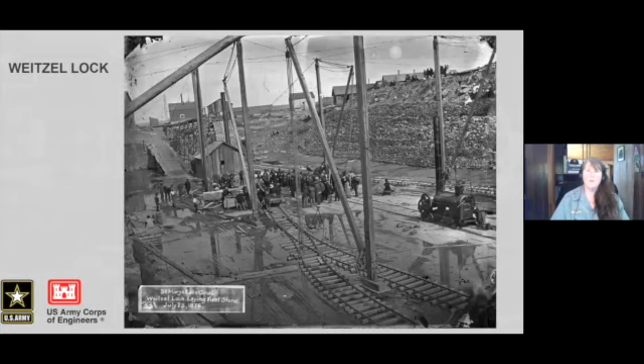Here a little group of people has gathered in 1876 to mark the placing of the first stone. This stone, by the way, is in the park, and if you come visit, you can go do another selfie there.

About a year after the placing of that stone, we have the chamber starting to take shape. You can kind of see the outline of the chamber - it was wider in the center than at the gates, which is why it has this weird little angle. We don't have hardly any pictures of this lock's construction, but this one was pretty good. I want to point out this lock is being made with cut stone - you see all that stone cut, and they're using stiff legs to place the stone and start constructing that chamber.

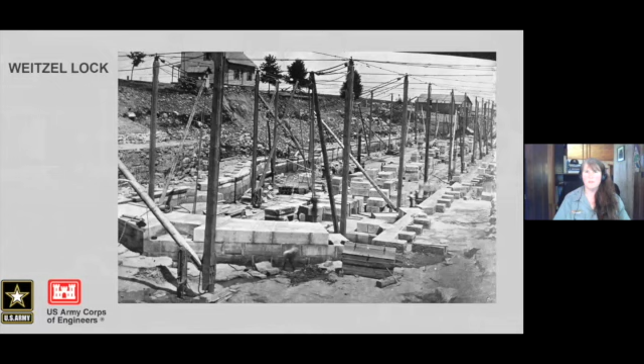Some more historical context: I'd like to point out that we had 3 presidents in 1881. Rutherford B. Hayes finished his term, James Garfield won election and was inaugurated, then was assassinated, and Chester Arthur finished his term. Two of those presidents, Hayes and Garfield, were Ohio natives. Another event in 1881 - the Cincinnati Art Museum was founded.

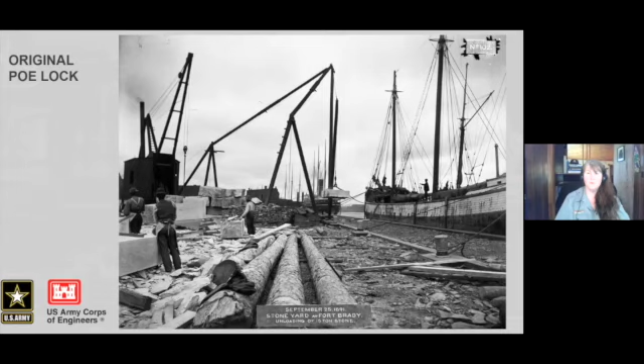On the Fort Brady property, there was a pier, and that's where they would unload the vessels that were all loaded with that stone. They used stiff leg cranes to lift them off and get them where they needed to work on them. I found a fun little Ohio connection to the Soo Locks - a lot of that stone came from Kelleys Island, Ohio. I found in our collection these pictures of them loading the vessels there. There were some quarry pictures too, but I already confessed I'm a boat nerd, so I went with the picture with the boat.

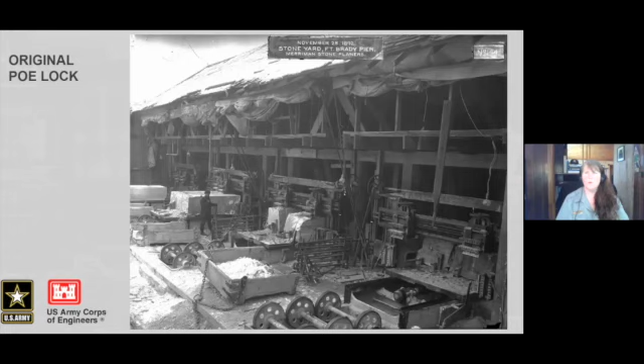Most of the pictures in the glass plate negative collection are of big things. A lock is a massive machine - they're some of the largest machines on the planet. So most of the pictures are very big and you don't see the people other than as a comparison for scale. These are some of my favorite pictures because you see the thought, the concentration, the effort of the work that these guys are doing.

If you follow our Facebook page on the Detroit District U.S. Army Corps of Engineers and you've seen our winter work pictures, you might recognize that I am definitely biased and that's the kind of pictures that I also like to take.

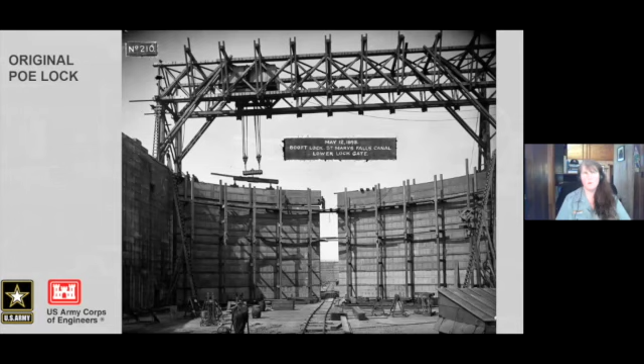Here they're assembling the gates in place. The gates are huge and we are able to lift them using hydraulic jacks and we have to work on them, but that's a whole different program, I won't get into that. But here they're building the gates in place, and then a picture of them after they were done.

I will also point out that these gates on the original Poe lock were the first on the St. Mary's River to be made of steel. All of the other gates were wooden.

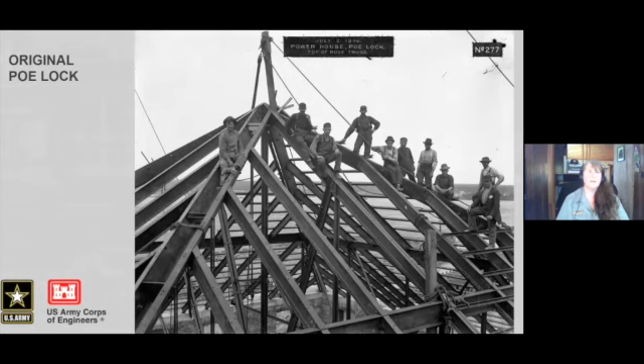And another photo we can never recreate, and I don't know who would want to try. This is the peak of the administration building roof. As you'll notice, there are no hard hats yet - that's not a thing. There's a couple guys holding on to ropes, but otherwise they're all just up there. No fall protection, nothing. Where they are is at least 4 stories off the ground.

That lock opened in 1896, 800 feet long, 100 feet wide. It was designed to lock 2 boats side by side, a way to try to make it more efficient. So they could do 4 if they were small enough, or at least 2 boats every time.

This lock was named for, wait for it, another Ohio connection - General Orlando M. Poe. He was born in Navarre, Ohio, and he was a Civil War general. He was the Detroit District Engineer and Commander for 2 different terms. He was also in charge of lighthouses for quite a long time. There's a distinctive style of lighthouse named for him - Poe-style lighthouses with a giant conical tower and an attached dwelling. There's about, I think, 9 or 12 of them all over the Upper Lakes.

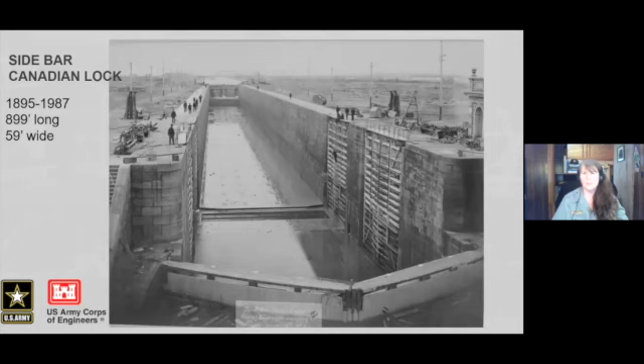About the same time frame as the construction of the Poe Lock, beginning in the late 1880s, they started their project on the Canadian side, around 1870 to 1880s. It's a big project and it takes a while. They built their own lock on the north shore of the river. This is a picture of it when it was nearly done. When it opened at 899 feet long, it was the longest lock in the entire world, and it was the very first one in the world to be powered by electricity. It had water turbines which generated electricity to operate its machinery.

This original lock closed in 1987. Part of the wall was collapsing, but they managed to stabilize it. In 1998, they opened a brand new lock inside the original chamber, which you see right here. It's the cutest little lock you ever saw, only 253 feet long and only 9 feet deep. About the biggest boats that can pass through it are the Soo Locks tour boats. Whenever the border opens up again, if you have a passport and you're up there, it's definitely worth a visit. It's a great Heritage Canada site. They have a museum there, and you can walk all over the grounds. It's really a beautiful place.

Back to the US side of the locks, traffic is continuing to increase. That just seems to be the constant drumbeat. We have 3 locks operating on the river: the Weitzel lock right here, the original Poe Lock over here, and of course, on the North Shore, the Canadian lock. And we're still struggling to keep up with the traffic.

Luckily, we got another lock approved. We're not going to replace either the Weitzel or the Poe Lock, but we're going to build a brand new one. The work on that lock, the Davis lock, started in 1907. What you see there is a team getting core samples of the bedrock below the surface. I've been told that we still keep and protect these core samples, and they are kind of a document that can be referred to by engineers.

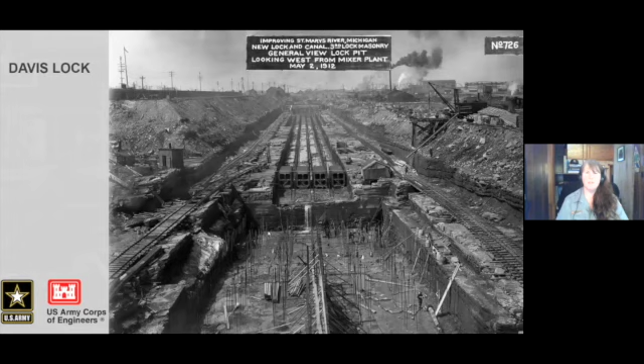A couple quick hidden features—I love telling this to visitors who come to see us. Most of what makes up a lock is hidden from sight; it's underwater or underground. These construction photos let us show you some of those hidden features. These are forms for the culverts, and you can see the track these culverts are going to follow, and the rebar in between where they're going to pin that concrete. The culverts are what the water flows through, almost like big pipes. That's how we're able to move all this water with just gravity and no pumps to change the water levels in the lock chamber. This is a close-up—you can see how big these culverts are, so it's moving a lot of water at a time.

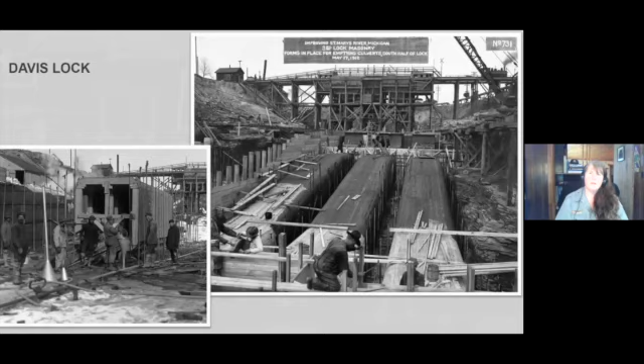And we have a view of the Lock Monolith. So if you were to visit us, this is the part you can see. This is the surface, and all of this is underground. And you can see how far out those bases flare out.

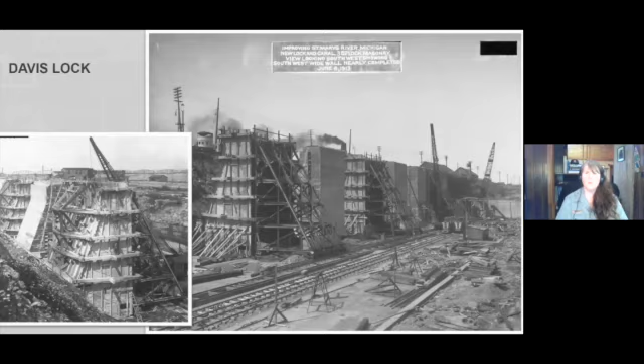They're actually 26 feet wide at the bottom. And my son is like a weird engineer thinker guy, and he likes to figure out impossible, ridiculous math things. He took all these measurements and figured out that there was enough concrete used to build the Davis Lock to pave a 2-lane road from Sault Ste. Marie to the Mackinac Bridge.

And another hidden feature, this is one of the discharge pipes. It's a 5-foot discharge pipe. And this is still in use when we dewater the locks today. We have to use pumps when we take the water below the Lake Huron level, because unless you're at the mystery spot, water doesn't flow uphill. So we use pumps to take the last bit of water out below the Lake Huron level, and we still use this pipe to get that water out.

More hidden parts, these are some of the valves. The Davis and Sabin locks used butterfly valves to let the water flow in if they were filling it, and to close those and open the ones at the lower end to empty it. Now we use reverse tainter valves, but that's a different program, so I won't get into the technicals of that. Here again, our safety officer would probably lose his mind.

This guy, it doesn't look like this is even attached yet. I can't tell if it's a suspended load because it doesn't really look like there's much tension on there. And this guy's just crawling around on there. And I will direct your attention to these two guys who are just sitting there. I don't know if they're on their lunch break or what. I have no idea how they got there, but it does not look like a happy, safe place for me to be.

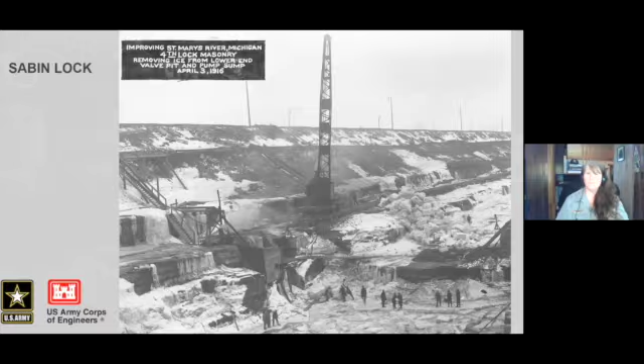I wanted to point out how wide these are at the base. Here they're backfilling it to bring it up to level with the ground. There's these railroad tracks, and a little locomotive hauling little wagons full of fill, dumping them in there. We can tell we're looking downstream because there's the administration building, and this is a new building that was built with the Davis lock, called the Davis building. That's a particularly wonderful spot because that's where my office is.

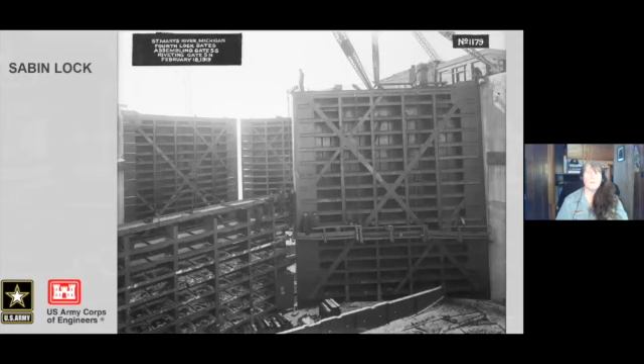We're assembling gates again, and some of their work is just downright terrifying. We zoom in, this guy's hanging on with just one hand. This guy's just leaning there, smiling for a picture. I don't know if this little board here is supposed to be for safety, but it certainly doesn't look terribly sound.

Here we are just about a week before the lock is going to open. It looks like a lady standing right on the edge. It's probably about a 50-foot drop there, but okay.

The other thing I want to point out is this Bascule Bridge. It was put in 1913 by the railroad company, and at the time it was the longest, largest Bascule Bridge in the world. It's also another feature we can look for when we're trying to tell if we're looking up or down.

A week after that picture, the lock officially opened. Here's a handful of people who came to watch it this time. I presume maybe it was cold, and they're all wearing coats. It's the middle of September, which is usually really nice weather, and it's a really small crowd. Lots of boats, not so many people to watch them.

This lock was simply called the fourth lock during construction, and it was eventually named for Louis Sabin. I don't have a picture of him because I can't find one. He was the designer of the Davis and Sabin locks, and he quite literally wrote the book on cement and concrete. That's a picture of his little book, which you can buy through Amazon or somewhere.

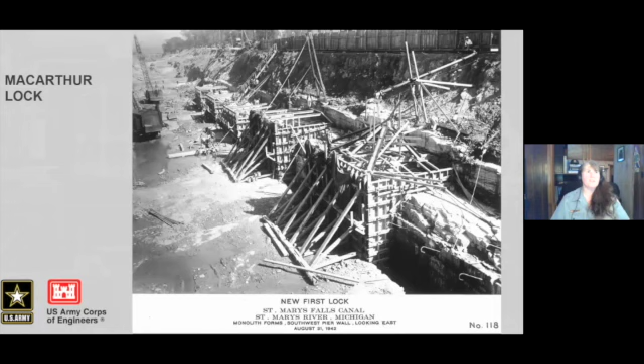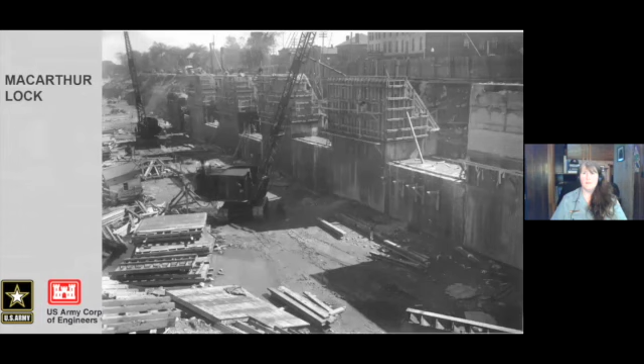By August—remember we saw that picture in June where they were dewatering and starting to remove that lock—by August they're starting to work on the pier walls. They're building those forms and starting to place concrete, and of course they're still excavating at the lower end. A few weeks later, they've come back and filled in the gaps between the sections they already poured, and now they're starting on the next layer of the pier wall.

We had some colorful safety signs. These were just too charming to leave out. We have a lot of safety signs around the Soo Locks right now because safety is a top priority, but none of ours are as colorful as this.

They were working on this lock year round, 24 hours a day, so even in winter they were still placing concrete into these monoliths to form the walls. What they would do is build the form and then build a heated shelter over top of it, keeping it heated so the concrete could cure. This created its own problems because sometimes these forms would end up catching on fire, which of course set the work back, so they took it pretty seriously. There were signs all over that said danger, watch for fires, fires help the axis—again reinforcing that it's your patriotic duty to be safe and make sure the work progresses.

This is a snapshot of the progress as of April 10th, 1943. Remember, we're going to open in July, and this is the nose pier. Whenever we build a new lock, we have to fix the piers so they keep up with the technology and dimensions. You'll see here one of these barrage balloons. These were a pretty interesting novelty when they arrived, but the citizens of Sault Ste. Marie pretty quickly got sick of them. They were filled with hydrogen, so they were extremely flammable, and they had a tendency to break loose and end up where they shouldn't be. There was one that broke loose near a grocery store and exploded, blasting all the windows out of that grocery store. So they were pretty happy to see the last of those.

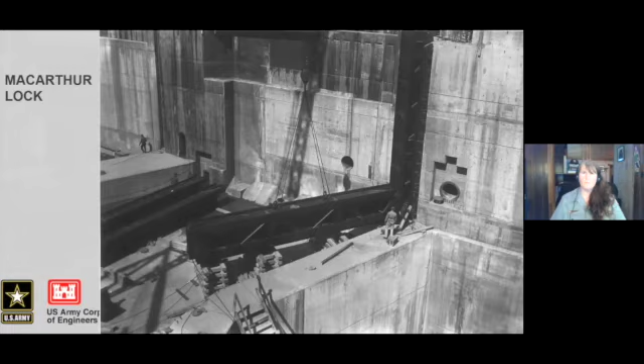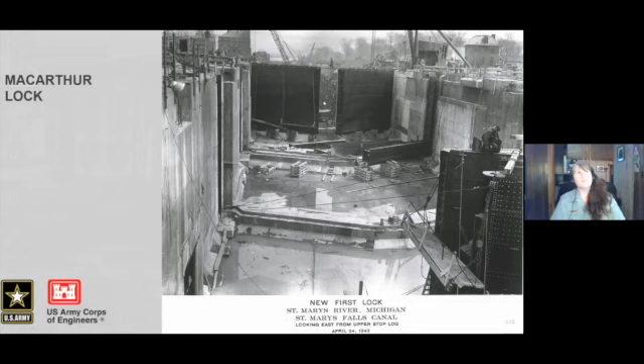Here's another view of that. A few weeks later, the gates are getting a little bigger. But meanwhile, if you look in between here, they're still building forms for the monolith down there, and it kind of looks like just a bunch of mess down there.

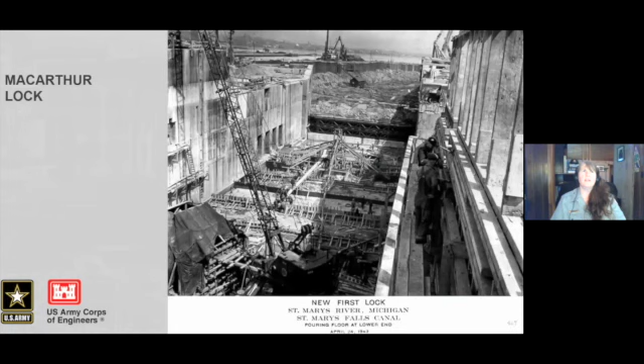This photo is the same day. So this is on the other side of those gates we were looking at. You can see they're in quite a different phase of construction at this point, and they're still excavating in the approach canal.

Here we are in mid-May. Remember, we're opening July 11th. Mid-May, we're still building forms and placing concrete. This is within the lock chamber because there's our upper gates, and so we're still placing concrete to form that lock chamber.

Same day, they're still looking downstream. They're working on the floor. The floor is getting a little closer to done.

This is June 10th. We have one month and one day until we're going to be putting a boat through this lock. And if you look at that floor, you can see the filling and emptying ports. That's where the water comes in and out from the culverts built into the lock wall.

Here we are at June 26th, and they're bringing the last load of concrete. Now, the park was closed during all of World War II, so I presume this is probably an office lady who came out to watch the last load because apparently this looked like it was quite a big deal. They've got the truck all decorated up and all the guys wanted to be in the picture of it.

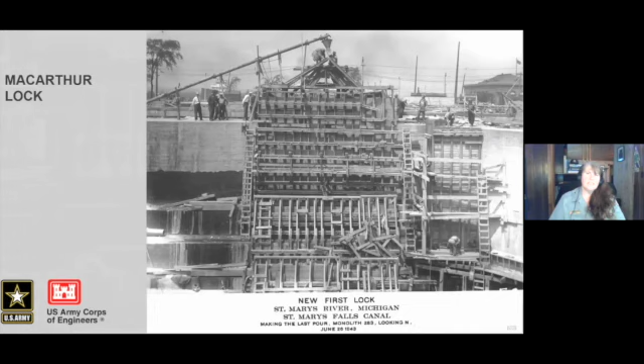And we have the placement of the last load. We've got probably one of the engineer bosses out here in their nice hats to watch the placement of that last load. We're about 16 days from the lock officially opening.

And here, June 30th, we're starting to fill it. That concrete was placed 4 days ago. I hope it was in a place where it doesn't matter about getting wet for it to cure.

And here we are, July 11th, 1943. Carl D. Bradley is the longest ship on the Great Lakes at the time, and she was the first lockage through this brand new lock. The Bradley at that time was 640 feet long. And I will also freely confess to you, this is a colorized photo.

This is not, it's based on an actual real black and white photo, but I found software that let me give it these beautiful tints, and since it was a happy day and a happy picture of a really tragic vessel, I wanted to use this color.

And I will point out, this lock was built in lightning speed. Lightning speed. They built it in just 13 months, from the photos we were looking at from June to July. It was 24-hour-a-day construction, 7 days a week. It was during World War II, and it cost twice as much as the budgeted cost.

It was named for General Douglas MacArthur. MacArthur was never a Detroit district commander, but he started his career as a second lieutenant in the Army Corps of Engineers, and he was the hero of the day, so it seemed appropriate to them to name the lock after him.

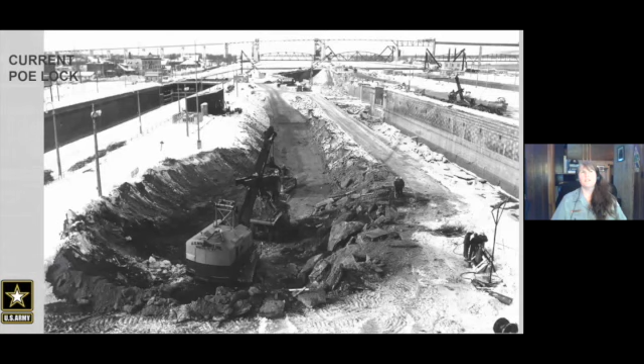They start building those crib dams to make the dry workspace. They start digging. Notice, of course, you need a much bigger hole than your lock. Over here is the wall for that chamber of the original Poe lock, and of course they're digging way over here. By March 26th, they have a much bigger hole. You can see we have a new train bridge — we got a new Bascule train bridge when they built the Davis and Sabin locks, and we got this new aerial lift bridge when they were building the Poe.

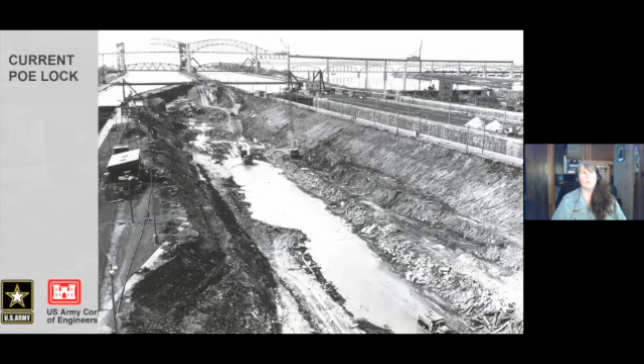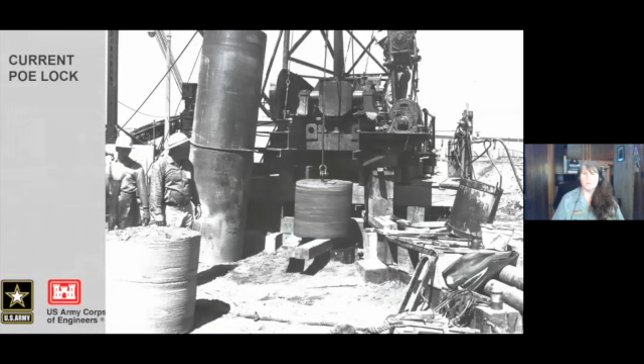In June, they were taking core samples to get a record of the bedrock the lock was going to be built on. If you come to the park, you can see one of those samples, and you can see that pink stone. So when we saw those excavation pictures, this is the color that stone would have been — it's this really deep pink and white. It's really kind of lovely stone. And if you come to the park, you can get a selfie with it.

In September 1962, most of the excavation is finished, and they are ready to start the next phase of building this 1,000 foot long lock. Except they have to stop construction and flood the work site to redesign it for the 1,000 foot long, 105 foot wide boats in the works for several Great Lakes fleets. Their 1,000 foot long lock that's 100 feet wide is not going to work.

So after much work and redesigning, on August 7th, 1964, they had a little hoopla celebration, and these two men pushed the button to start the pumps so they could begin the work to build a 1,200 foot long, 110 foot wide lock. In August 1964, they're also building a new pier — they have to extend that nose pier out here. And I'll tell you, that is a very long pier.

I don't want to test your patience, but I have friends on boats, and one of my friends is a deckhand — I won't name any names. He was put off on the pier to walk his boat in. So he walks his boat in, sends me a message, I go out and wave to him, and then as the boat's leaving he sends me a message that he thinks he dropped his wallet on the pier. Could I please go take a look for it? Of course, I'm a nice person, so I said sure. I put on all my gear — it's about 10 degrees outside, the wind is probably at least 10, 15 miles an hour — and I walk the entire length of this pier looking for his wallet, which I did not find. I turned and went back, walking right into the teeth of the wind. I get back to my desk and look, and I have a message from him that he had found it — it was in his other pants.

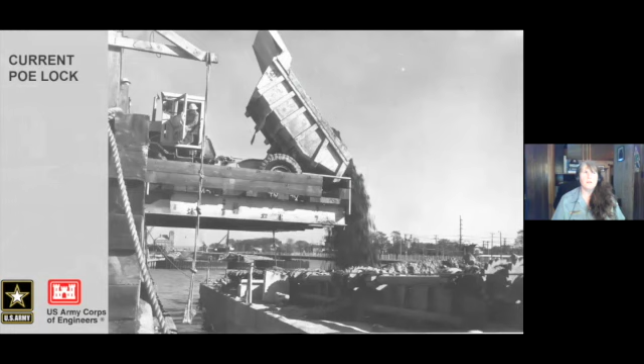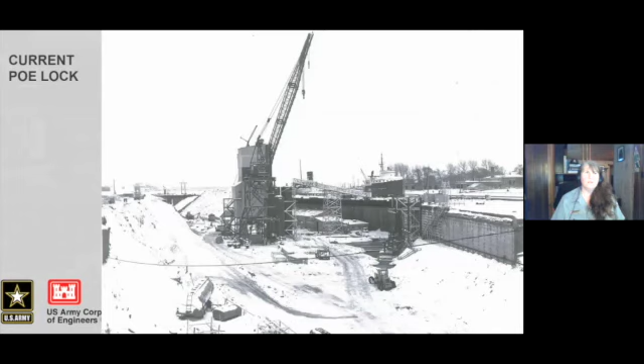This is a nice aerial view — you can see how big of a hole you need. Over here we have the raw materials for the cement mixer plant, to make the concrete as we need it. Again, this lock is being constructed on an island, just like the original lock, so all of the excavated materials have to be loaded into dump trucks, then loaded into barges, and hauled away. There's a picture of the mixing plant, and they had kind of a little makeshift dock on the crib dam to allow the boats to come in and bring the raw materials for that.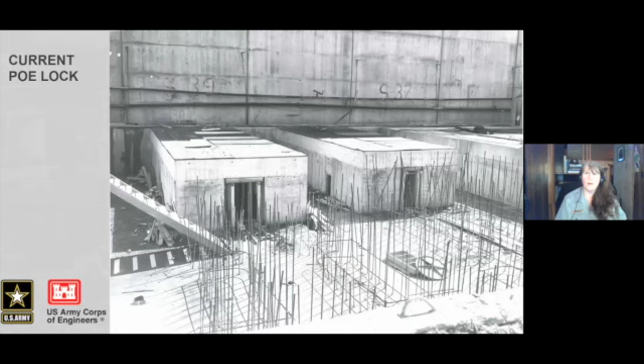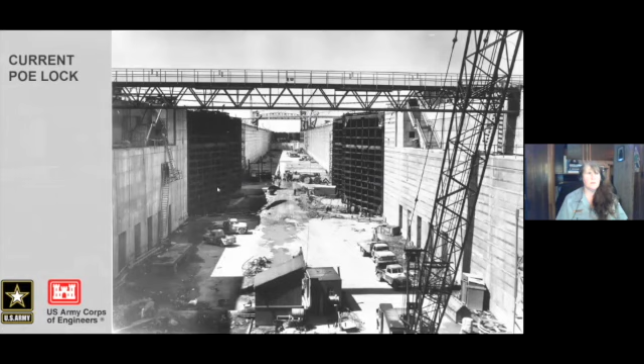Here we are in August '67, and you can see the emptying ports. At the upper end, there are filling ports. So the water goes into the culverts through these filling ports. It travels through the culvert, comes out into the laterals. When they're filling the chamber or emptying the chamber, it flows out of the laterals into the culvert and down out of these emptying ports.

Here we are in October '67. In just that short amount of time, they have removed the crib dams, and they're using those stop logs as a temporary dam to hold the water out. And at the lower end, they're using guard gates, which are mitered gates that water pressure holds closed to form a temporary dam as they're finishing up the lock.

And then in 1968, this is August, they start filling the lock, which is of course the very first test of a new lock. This is a pretty exciting process when they do it this way. We used to do it this way every winter, but now we don't, sadly. We have a much more boring and probably safer way of doing it. But if you'll notice on the other side of the lock canal, look at all the people who've come to watch. So this is clearly a very big deal.

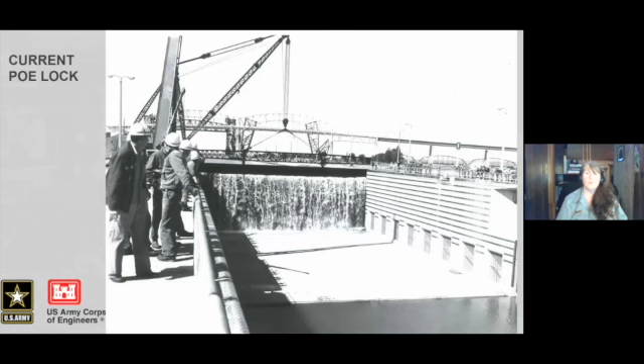And they're filling it up to see and make sure it all works, that the water goes where it's supposed to, and that they're able to move it as they need to with operating the valves. The second test was the passage of the Philip R. Clarke fully loaded, and it was the first time they ran a loaded vessel through.

Now, one of the shocking things to me - so this is October 1968, they test the lock, it all works beautifully, and then they let it sit. It sat for almost 9 months. After that lockage of the Clarke, they did not use it again because they wanted to have an official grand opening in conjunction with events at the Welland Canal in June 1969.

So we've made it to the 9 months or so later, and the Philip R. Clarke got to also be the first boat to open the Poe Lock. So we're in June 1969, and we are officially opening the Poe Lock. There was quite a hoopla and a to-do. There were some bands. There was a little parade.